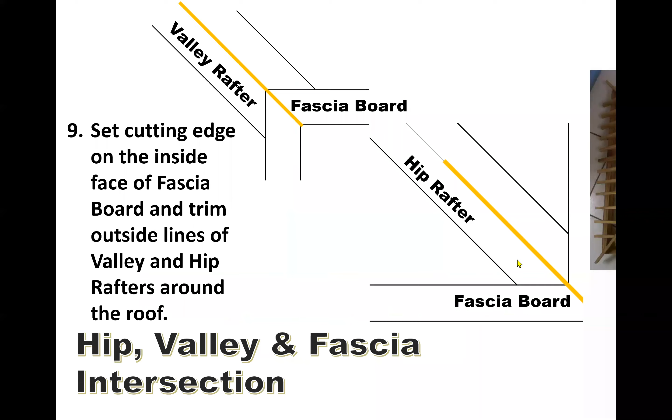So we are now going to be moving to the step where the same valley rafter meets with the ridge board to form that intersection. We're going to clean that up. This is kind of similar to what we're doing. So this would be your valley rafter going up here, and it meets with this ridge board and the blind hip. So you have three pieces of board meeting: ridge, blind hip, and valley rafter.

So we need to get those three boards meeting together. This is a kind of close-up. This is not really a nice clean joint, but I just give it to you like that so you can have an idea where we're at.

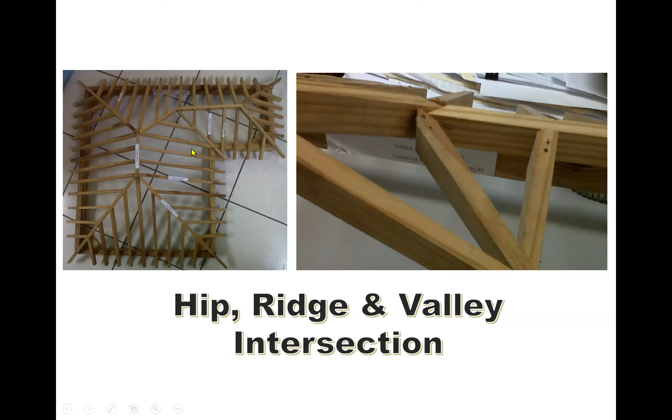So the ridge board is on the right here, and the flying or blind hip comes down to meet that one. So two pieces of board meeting together there, and those two pieces of board will now be supporting the valley rafter, which is in the inner portion right here.

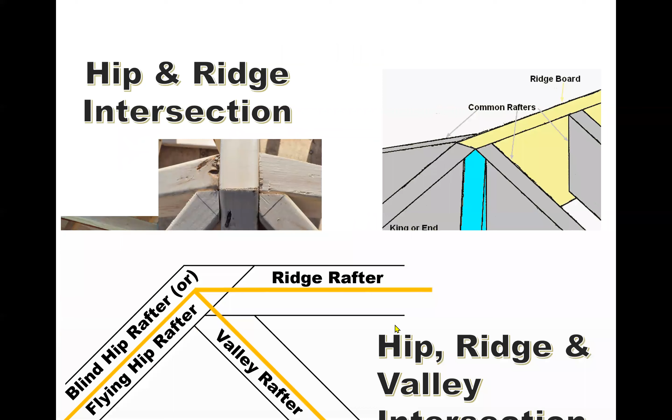All right, before we get to that intersection, we're going to be looking at how we draw that. So we're going back to our AutoCAD screen where we can now work on that portion of the drawing.

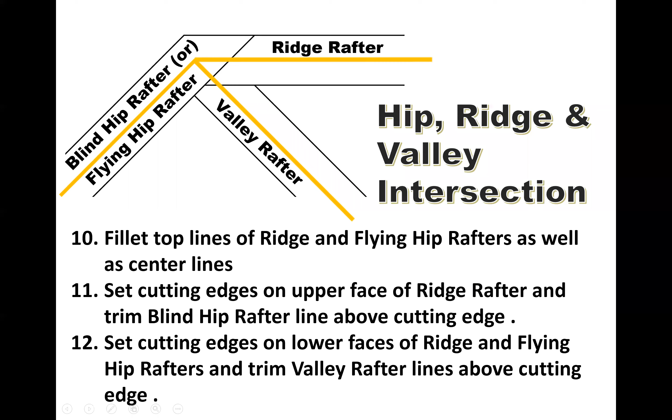All right, so we're going to zoom in now at the top of the valley rafter. So here is our valley rafter, and we're going to go up to the top, zooming in where those three members will meet. This over here on the right would represent our ridge board, the one on the left would represent our blind hip, and the one in here represents the valley rafter, which is going to be supported by these two members.

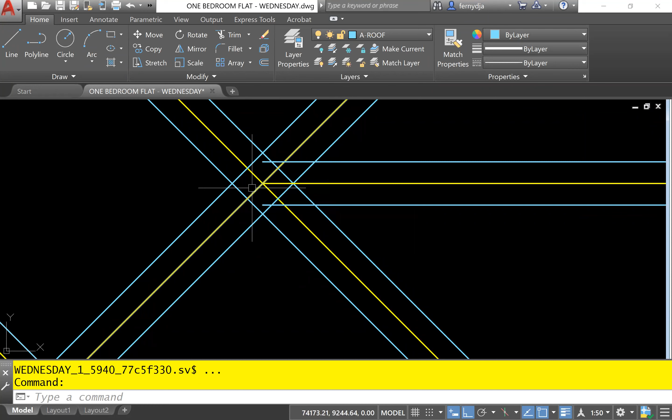So I'm going to start out by working on the ridge and the blind hip, and afterwards I will support the valley rafter. But I'll start with cleaning up the center lines first with my fillet. I want to ensure that my radius for fillet is 0 so that the three lines meet together. This one, the blind hip, meets with the valley and the ridge. The ridge board is okay, I don't need to do anything. So in fact, I just really need to fillet these two at 0 radius.

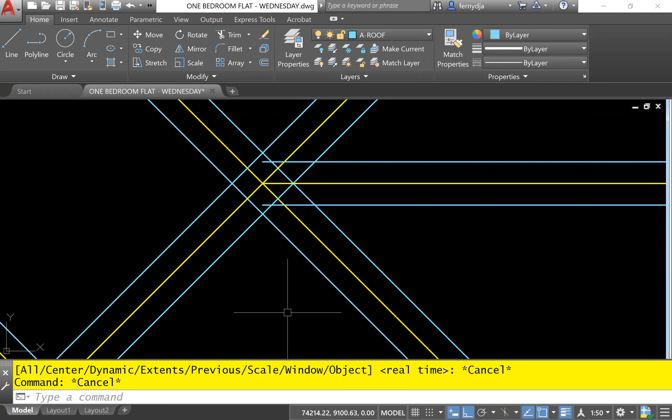So if I go with F for fillet, enter, and then I'm going to ensure that my radius is 0. Let me go again: F for fillet, enter. My radius currently is 20, so I need to either type R, enter, or click on radius down here, and then set the value of my radius to 0.

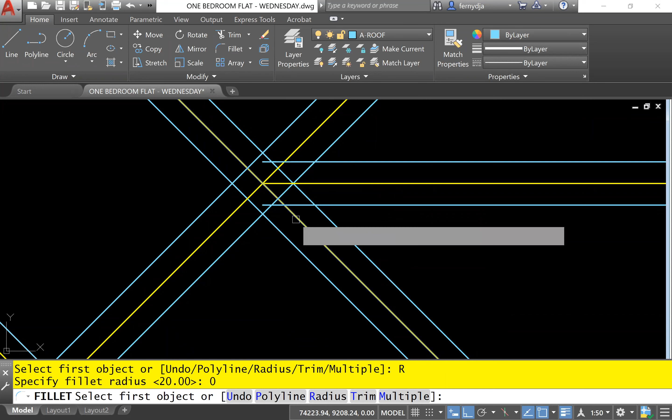Okay, and then all I need to do is click on this line, which is the center line of my valley rafter and the center line of my blind hip. So now I have these three lines meeting accordingly. I am not going to get rid of my center lines because it is going to help me know what's going on at every step of the game.

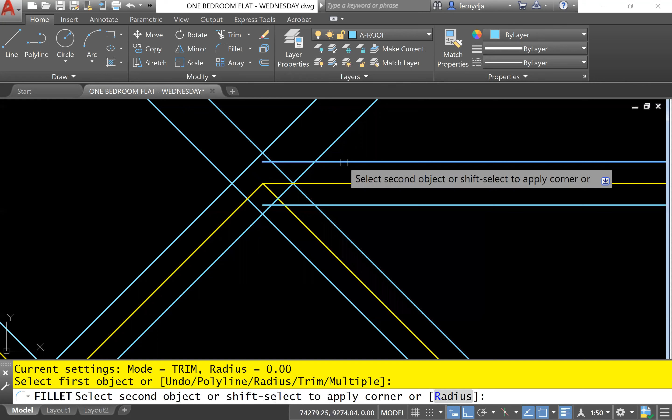So let's move on. What I will do next is also fillet the top of my ridge and the blind hip to have the two of them meeting here. I'm trying to clean up that one first. So let me press enter to repeat the fillet. That's this one and that one. Good, so that basically will terminate right there.

And then I'm going to set my cutting edge on this line here and trim off the excess going up. So TR for trim, enter, and then remove that portion. So this line is taken care of there. I can now see my blind hip right there.

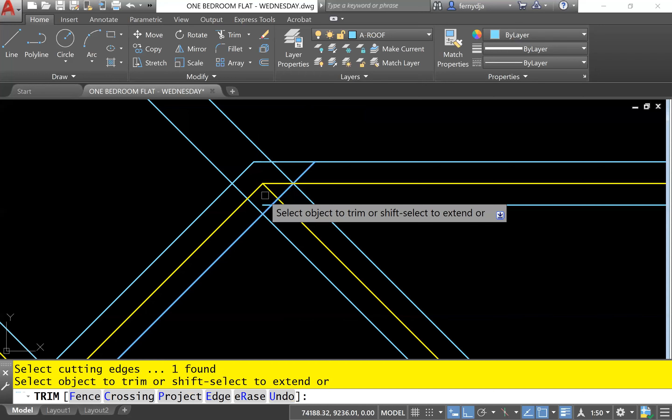But now I want to get my ridge board terminating on the blind hip. So I set my cutting edge here and TR and trim off this little piece right here. Good, so you can now see the ridge board meeting against the hip, blind hip.

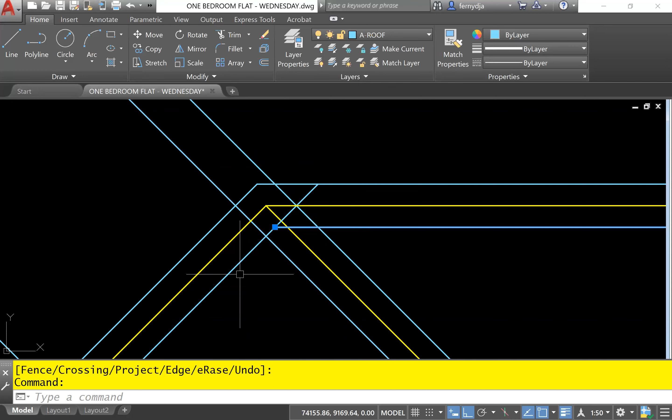So now I have two cutting edges, so I can terminate my valley rafter. I have a cutting edge here and a cutting edge there. So TR for trim, enter, and then I can trim that one, then trim that one. However, I need to also trim it down here again.

So what I have is the rafter now meeting two cuts: one cut against the ridge board and another cut against the blind hip. So these two pieces of board will first meet ridge and blind hip to support the valley rafter. I'm leaving the yellow lines to indicate the different center lines.

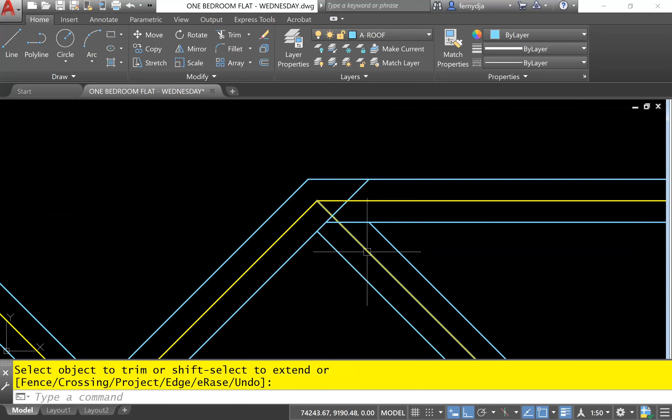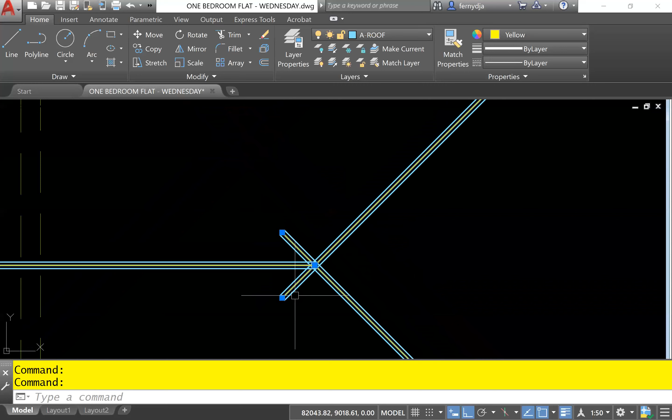What I'm going to do though is change the line weight of my center line because it's a little thick. I just want the outer lines to be heavy, so I'm going to select all of my center lines. 1, 2, 3, 4, 5 - I have some more over here. I'm going to change the line weight so that it's very thin, and only the line weight of the rafters will be a little heavy.

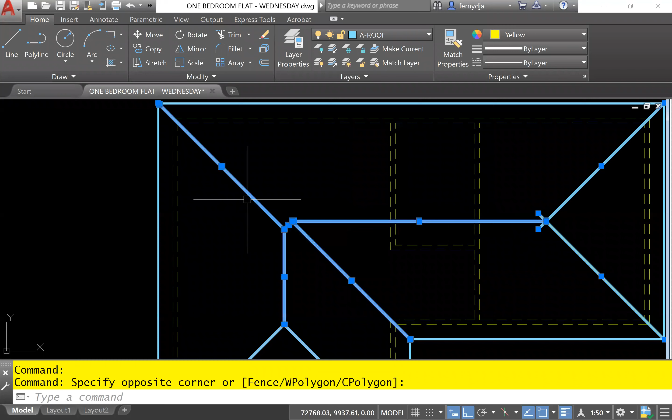Matter of fact, I don't even need the line weight for any of my rafters to be heavy. So what I will do is force all of them, because I don't want it to look too cumbersome. Let me select all of my rafters, whether center line or not, and force the line weight for these to be default.

You know what, since it's on by layer already, what I will do is just change the line weight of the layer because I don't need it to be heavy. It's just that in the roof plan, sometimes you might want the line weight to be a little heavy, but you can go with the roof plan without the line weight.

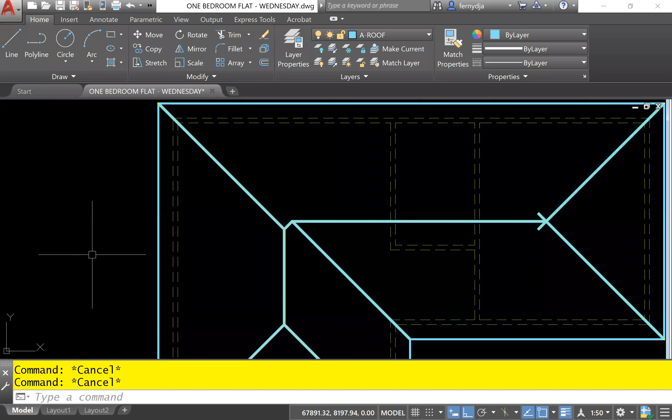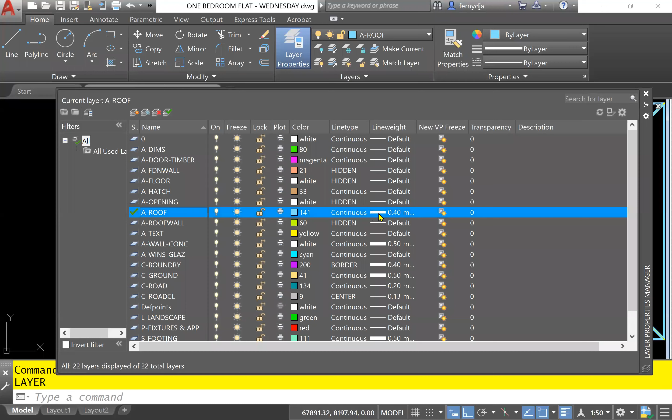All right, good. I'm going to go to my layer and change the line weight of my roof to be thinner than it is. I only want those line weights, when I cut through them, to be a little heavier. So this one really shouldn't have been so broad, so I'm changing back the line weight for my A roof. Instead of 0.4, I'm putting it back to default. You'll notice that the line weights are not so heavy anymore.

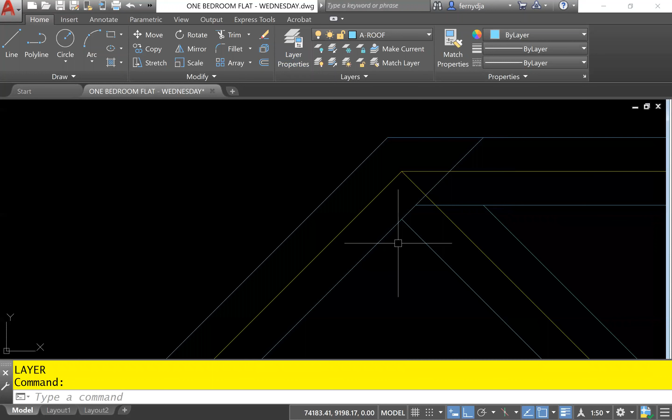So now I have my intersection right here where the valley meets the hip and ridge. Now I'm going to work on another intersection, and that's this one, where I have the two hip rafters meeting with the ridge board. But really and truly, normally you should have three common rafters meeting perpendicular to each other, and then these meet like that. So let me give you a graphical view of what it looks like.

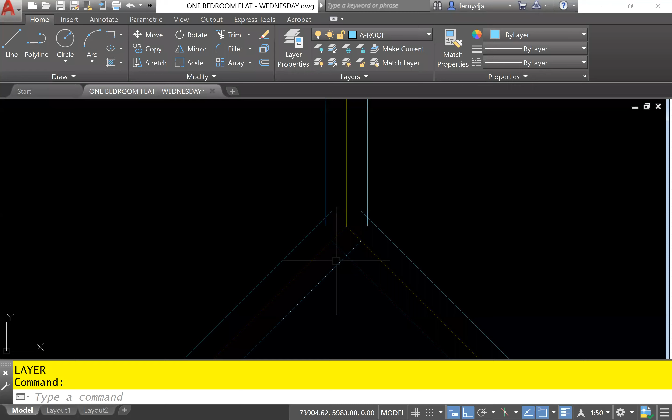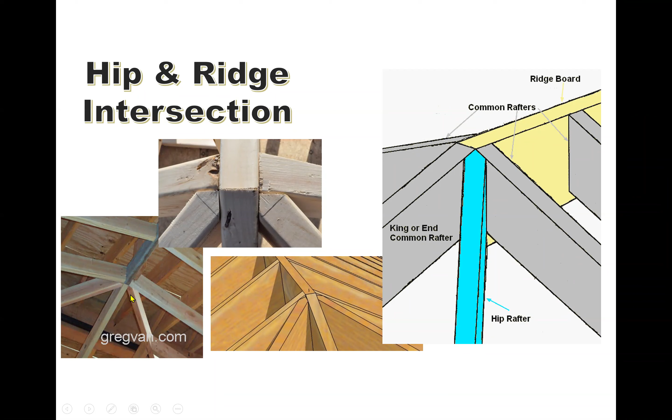And this is what it looks like underneath. So you have the ridge board, common rafter, common rafter, common rafter. Now this common rafter is what we call the king rafter or crown rafter, and then we have the hip rafters like that. So in plan, it ought to look something like this.

So we have the ridge board, and then we have the common rafter either side of your ridge board at the end here, as well as here. So the three common rafters will be perpendicular to each other. This one is really the crown or the king common rafter, and then in between you have the hip rafter.

Now what I'm going to take you through is our 5 simple steps to get you to look like this, and the steps are listed here. Step 1, we're going to extend the ridge lines to the center of the hip, which is why I change the color. So if you have the ridge line, we extend it down to touch the center line of the hip rafter on either side.

Step 2, and the numbers on this correspond with the numbers down here, so the steps basically correspond with these numbers. I just number it graphically so that you can see the steps here corresponding. Number 1 was to carry the lines down to meet the hip rafter. Then number 2 now would be to terminate where your ridge board is, so we would draw a line from endpoint to endpoint, so that you could now see your ridge board doing this.

Step 3 is to draw the lines representing the common rafters. From the end of the ridge board, we draw the line coming down perpendicular to the inside.

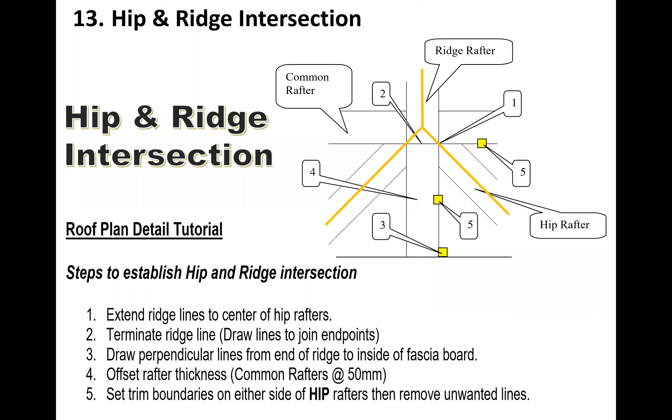Here we go. Step 1, I'm going to zoom in right here, and that is to extend these two lines to these two lines.

I'm going to use the shortcut extend, so EX, enter, and press enter one more time, which means select all.

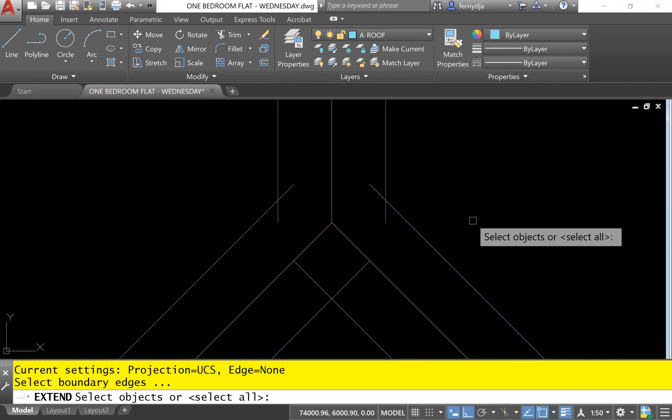When I click on this line, it extends it to the nearest boundary, which is this line. I extend that line too, and it goes to the nearest boundary. Good, now I can see my two ridge lines, so I can terminate them from endpoint to endpoint.

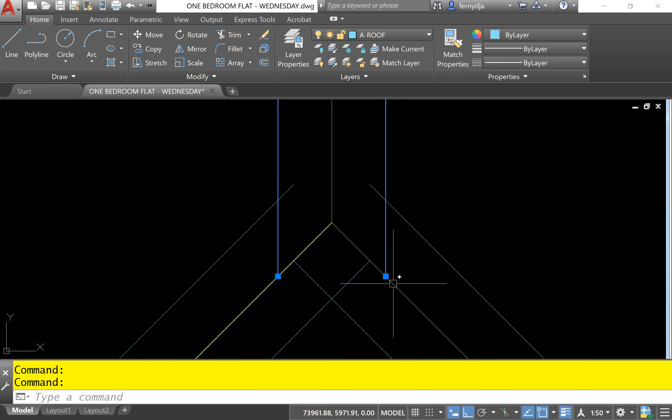So we draw a line from the endpoint of this line to the endpoint of that line. Good, that is where your ridge board would terminate.

I'm just going to use the advantage that I have right now to go ahead and draw one side of your common rafter.

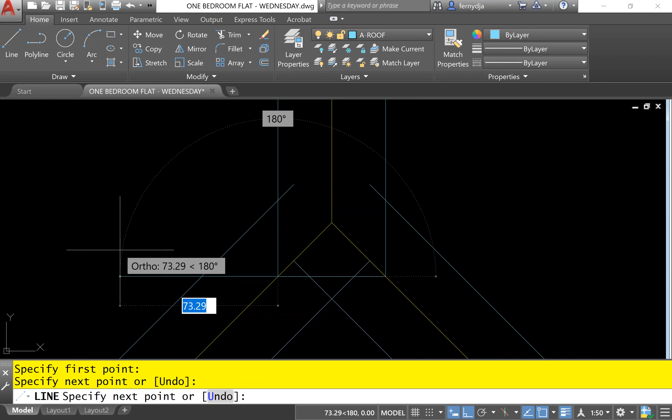I'm going to zoom out and carry it across, and it will be good if your ortho is on so you can easily go across until we get to the inside of the fascia board, and we need perpendicular osnap.

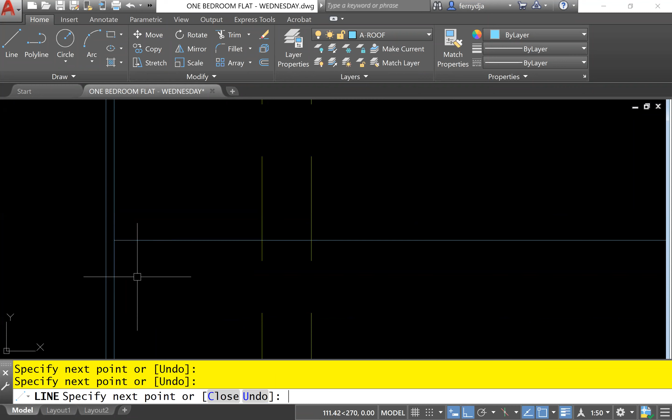That line was drawn from the endpoint of your ridge board to perpendicular inside of your fascia board. That's one, remember it's three of them we have, so we need to draw another one.

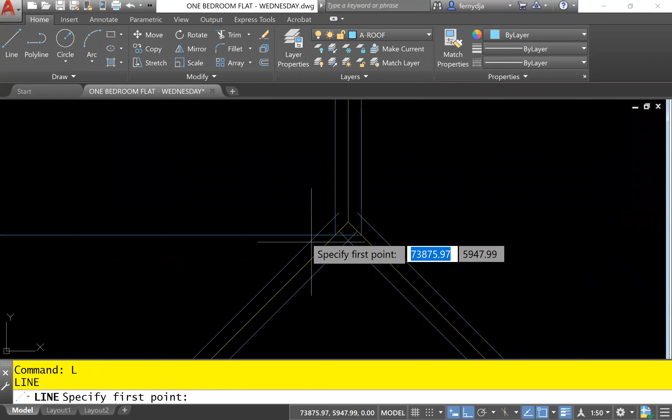So L for line, enter, and from that same point we carry one coming down, whether intersection or endpoint, and that one goes all the way down again to inside your fascia board, perpendicular. Good.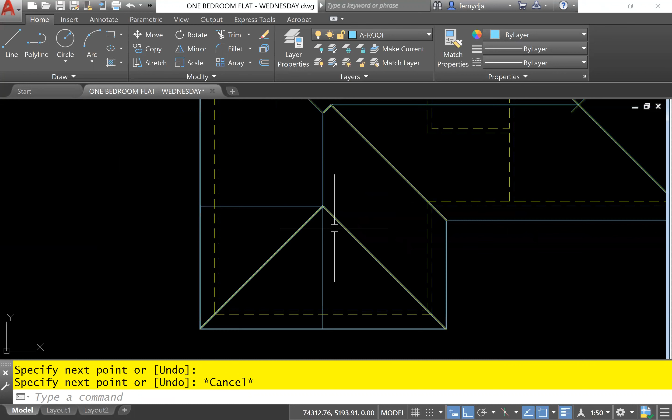Then the last one, we're going to go from the opposite end this time. From the endpoint, but this time we can't get to the fascia board because the fascia board is all out here, so we're just going to let it pass over.

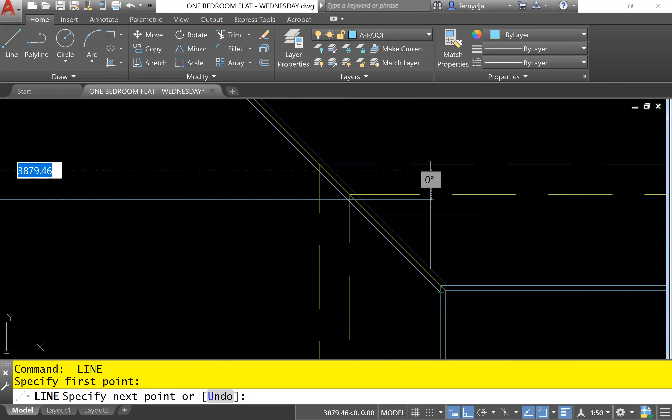This one really and truly is not a common rafter, it is a valley jack rafter. It's going to go against the valley rafter, so we'll just keep the ortho on and let it pass over.

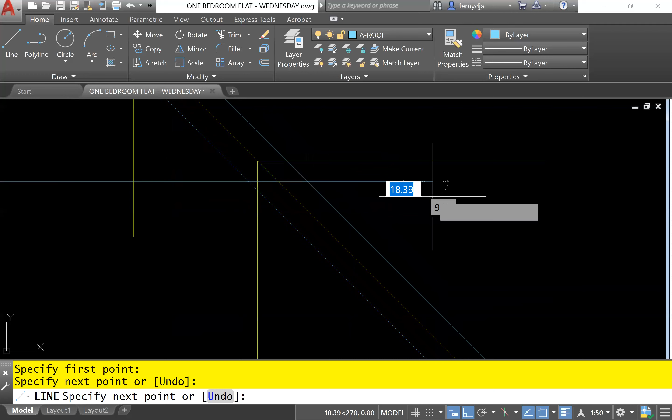I don't want to click on it because I won't know exactly where on that line. It's best that you let it pass over, click, then press enter, and later on we can trim up against this line.

So we just need to draw one side. We have one side going this way, one side going that way, one side going this way.

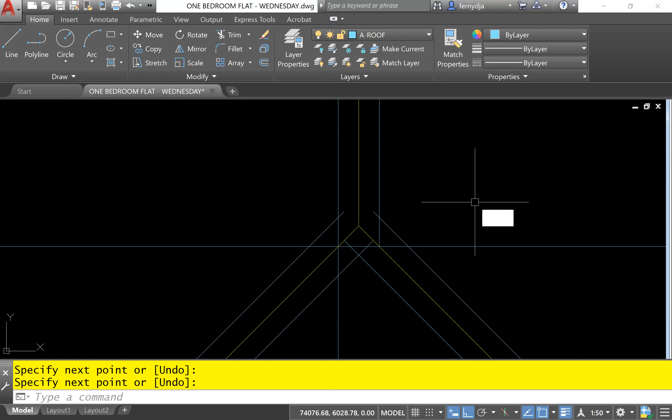Our next step is to get the other side, which is now to offset it. So if I type O, enter, and the distance we're offsetting is 50 millimeters, the actual width of the rafter, 50, enter.

We click that line and offset it above, click this line and offset above, and this line to the right. Now, how do we know which side to offset it?

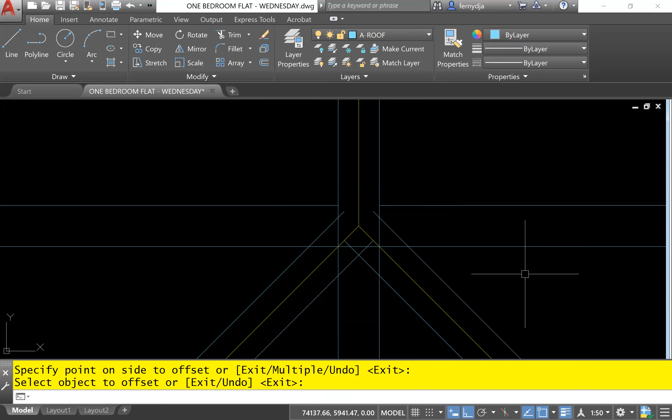The important thing to remember is that the common rafters must touch your ridge board. So if these three lines make up my ridge board, 1, 2, 3, it means I must get this line touching it.

If I were to offset this line below, then it would not be touching my ridge board. In fact it would not even be a common rafter, although this one isn't either, but over here it's a better example to understand it from.

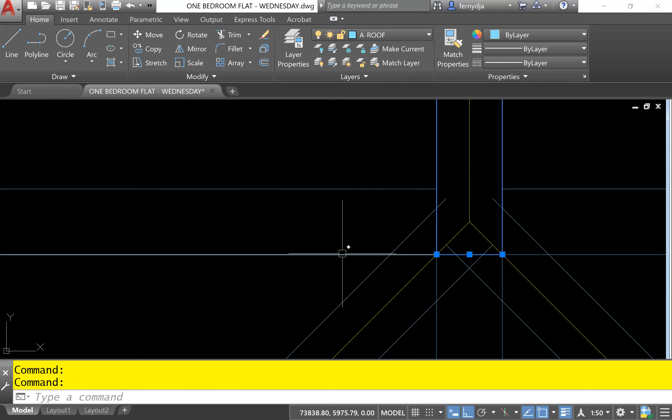If I were to offset this one down, then it would not be a common rafter, it would automatically become a hip jack rafter. But because I offset it above, it's touching the ridge board.

So it is now a common rafter. What I need to do is set the cutting edges on those sides, on either side of the hip rafters, in this case, hip over here and hip over here. So cutting edge for this line, cutting edge for this line. I can trim off that line, trim off that line, trim that line. So once you can identify your hip rafter, you know that your cutting edge will be on either side with your common rafters.

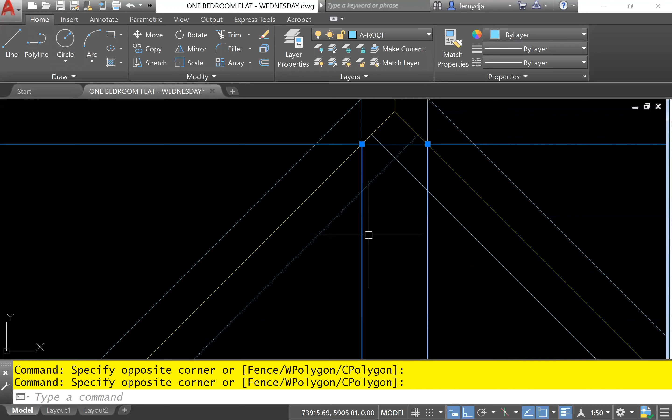So TR, enter, and you're going to be trimming off the excess. As you can see right now, that's your hip rafter fitting right between there. So likewise, if this is the cutting edge, then this is the line that you're trimming. And if this is your cutting edge, then this is the line that you're trimming.

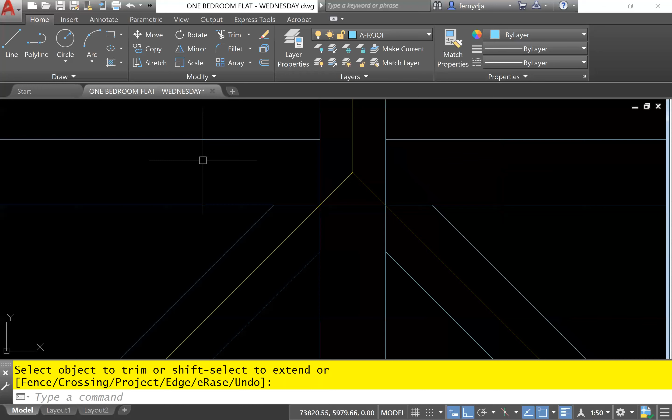So as you can see right now, we're seeing the three members. We're seeing the hip rafter on either side. We're seeing common rafter, common rafter, common rafter meeting with ridge board. All right, so we're going to do that two more times. Up here, same principle.

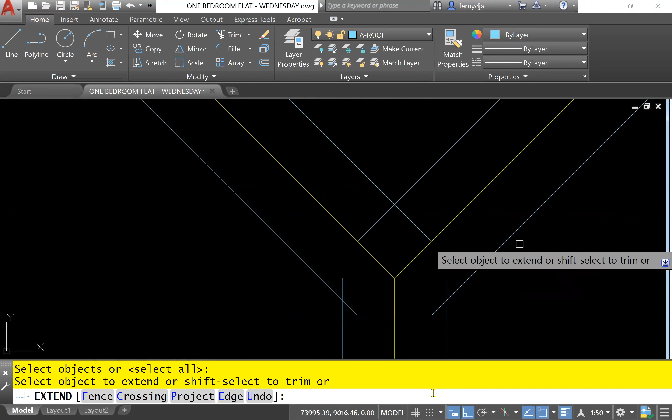So let's go again. Step 1 was to extend, EX, enter, enter. We extend the ridge line, 1, 2, enter. Then we're going to terminate the ridge board with the line command, from end point to end point, and continue with another line to the inside of the fascia board, perpendicular.

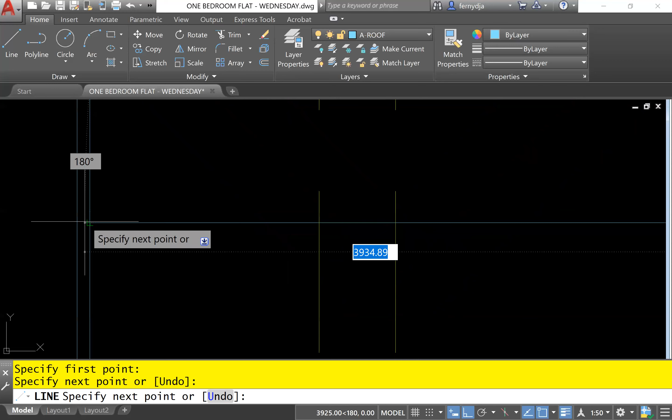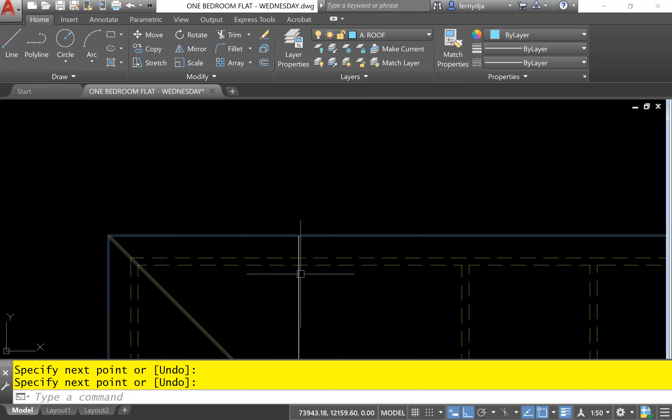That's 1. Repeat the command again. So we need 3 lines, right? We have 1 so far. So we need 1 more from that same point, going up to the inside of the fascia board, perpendicular. Oh snap. So we click, enter to end the command, enter to start the command again, and we want one going the opposite direction now.

So here we have a line going from end point or intersection, and this time around we don't know where it is going to stop, so we just carry it across and click, keep it horizontal. Then we're going to offset. Of course in this case, if you offset it above, it will not be a common rafter. It won't touch the ridge board, neither will it touch on this side.

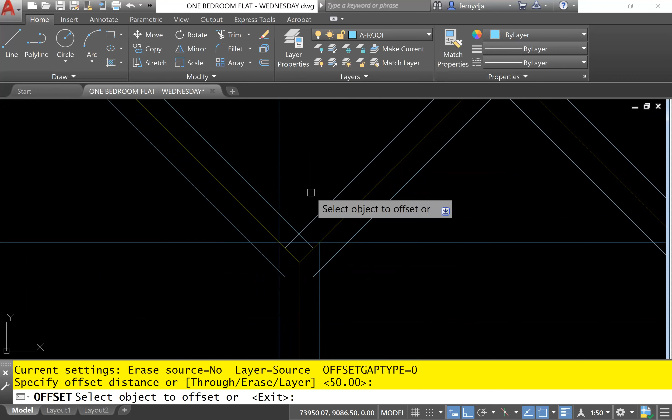So that's how we know where to offset. It must be touching the ridge board, so we have to offset down and then offset this to the right. So O, enter, and the last time we offset our distance was 50, so we don't have to type it again, we just press enter to repeat the distance. We're going to offset the vertical one to the right, offset the two horizontal ones below.

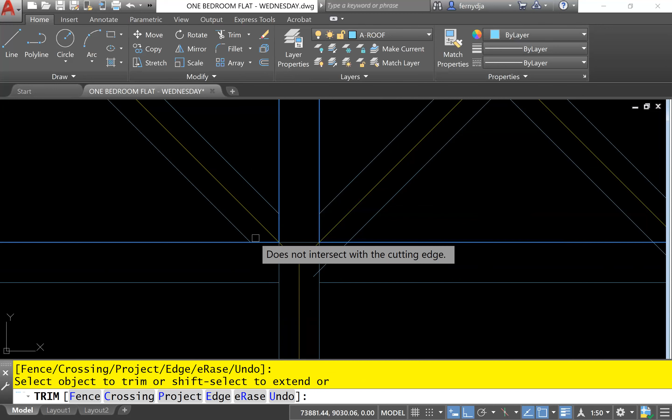Good, and it's time to clean up. So on either side of hip, 1, 2, 3, 4. TR for trim, enter, and we're going to trim the excess - that would be the distance beyond. You cutting edge there, so you trim off the excess over here. Cutting edge there, trim off the excess over here. Cutting edge there, excess. Cutting edge there, excess. And we end up with that.

So 5 simple steps. We have one more time to do the same thing on the other side of the roof over here, one more time. So by the third time, you should get it if you didn't get it before. So I'll begin by cleaning up our center lines first. So fillet with that - F, get my first 10 minutes countdown.

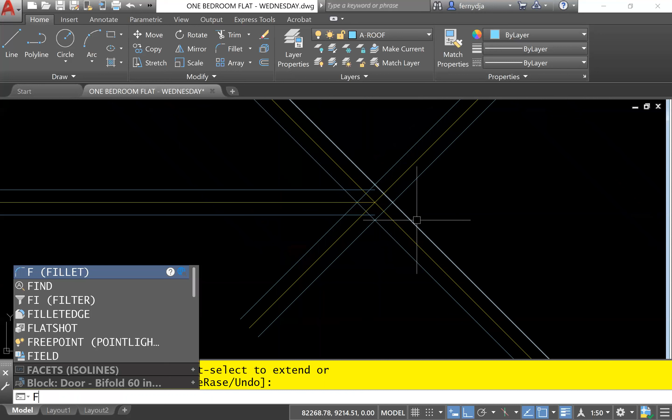Hopefully we'll finish the cleaning up before we reach the end of our first segment. So F for fillet, enter, and radius is already 0, so I just need to click these two. If you notice, my center lines are cleaned up. But I'm going to clean up the other two.

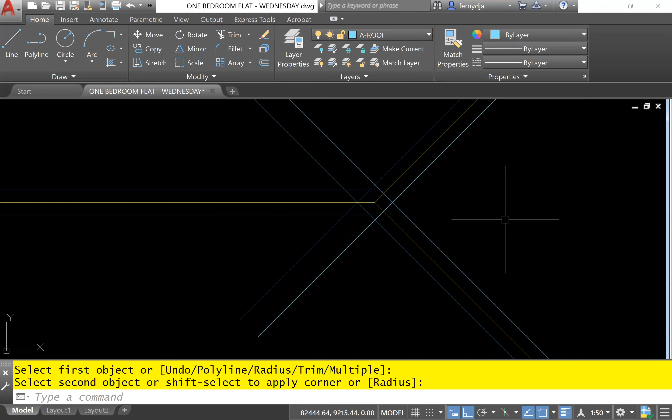So let's do one more set of fillet. F, enter, M, enter, since I'm going to do it twice. So I'm going to clean up these two just to get rid of some of those excess lines, and these two. Good. All I wanted to do is just get the place looking a little bit more organized to work with.

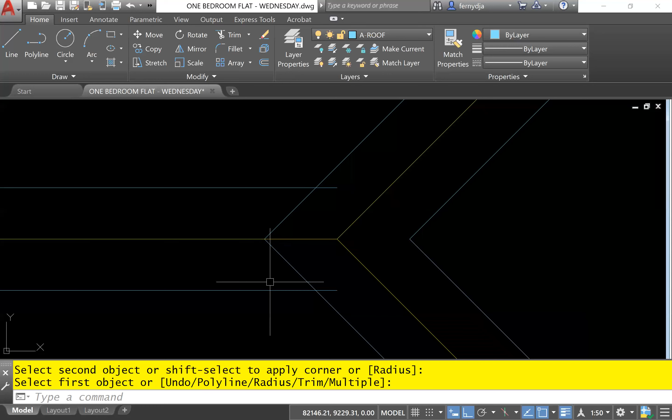Step 1, extend ridge to center of hip. So E, X, enter, enter. Put it in the shortcut mode. So we extend 1, 2. Do not extend your center line.

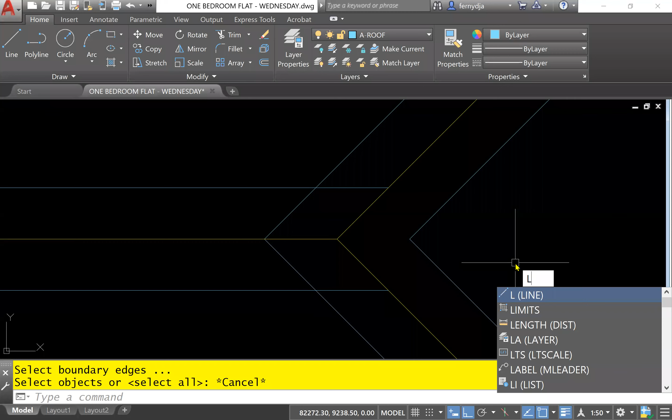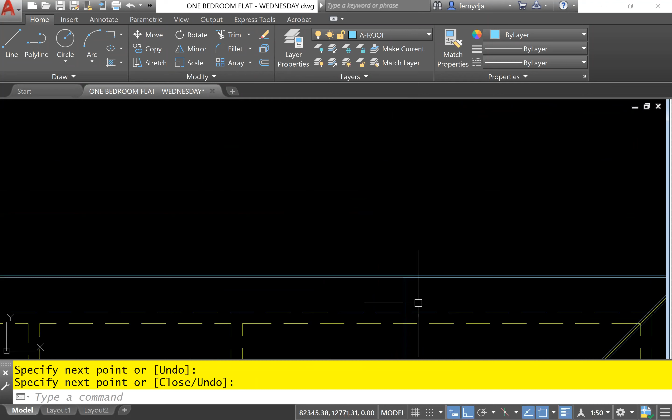Then we're going to draw the line, L for line, enter. We're going to terminate the ridge board, so from end point to end point. So my ridge board has been terminated, so I'm ready now for my common rafter. We're going north first, one side of the rafter first. So enter, enter to repeat the command from the same point.

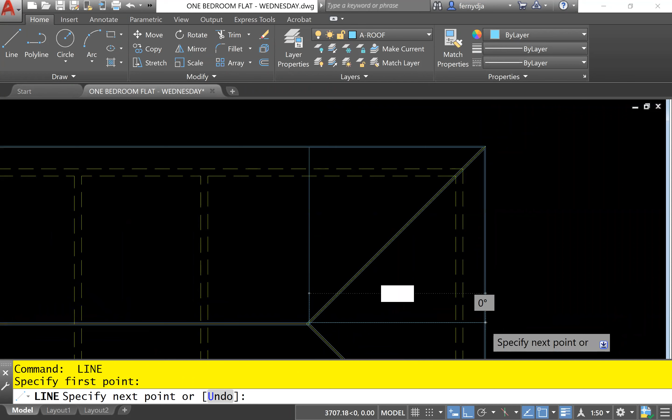We're going to go east. Zoom in—it's not perpendicular. Remember that it should be on the inside face, not the outside face. So, perpendicular. Enter, enter to repeat the command.

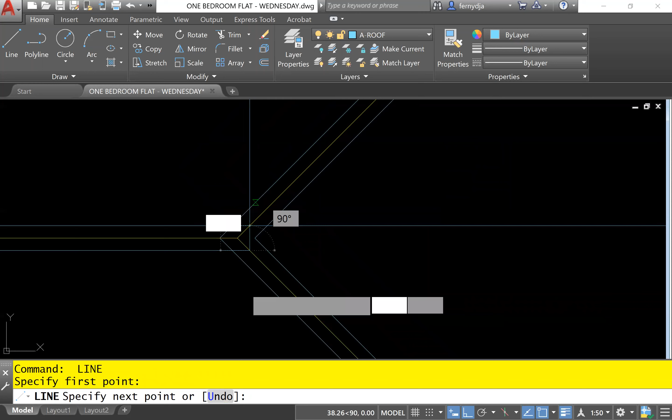We have one more—remember, it's 3 common rafters. So this one going from the opposite point, and we're going south this time. We're going down again to perpendicular on the inside. Escape. All right, so we have one side for those 3 members.

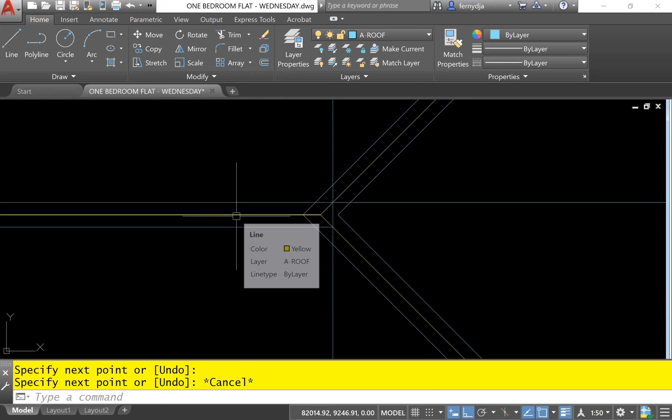We can offset the other 3 lines. So O for offset—our last offset distance was 50, so I press enter to repeat that distance. We offset to the left for these 2 vertical lines, and below for the horizontal lines, 50.

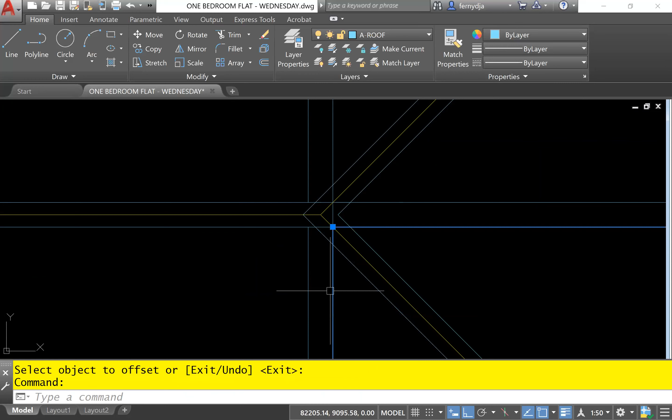Then our last step would be to set the cutting edges on either side of our hip rafter, and then trim—TR, enter—to trim off the excess. So this is my cutting edge, this is my line. That's my cutting edge, that's my line. So this is the line you're trimming.

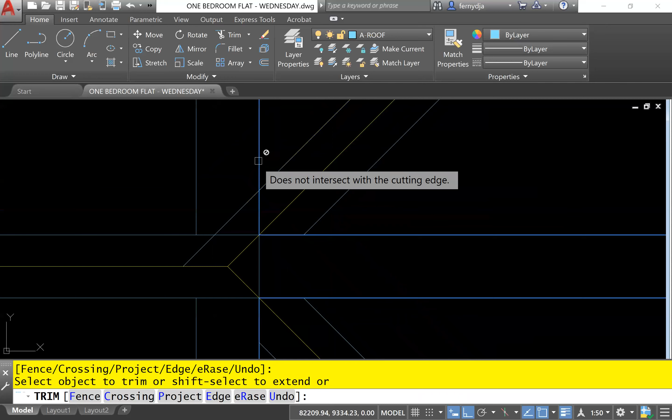So there we have the common rafters—one, two, three of them. And in between those two, we have hip rafter, hip rafter.

Okay, let me save the changes thus far. So that basically would be the layout of the roof—these are the rafters that you would likely put up first.

Now the next stage would be to look at how you populate the rest of the roof with the other rafters. That will include a lot of mirroring and array. So we'll first array to get multiple offsets, and then we're going to be trimming to clean up in each case. I have the steps that we're going to be looking at, so let me jump back over to the presentation.

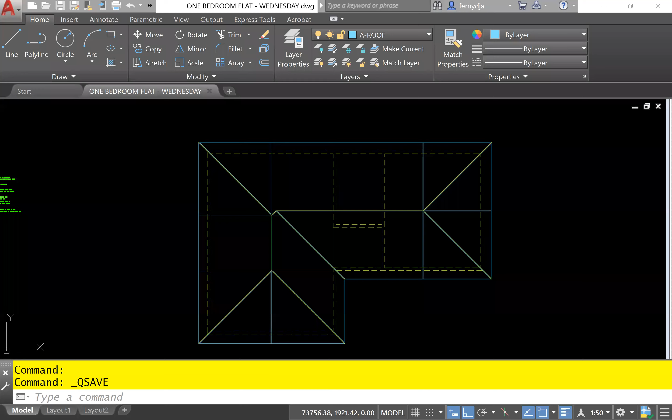If you want to know how we get 7, by the time you divide the spacing center to center in this distance, it will tell you the maximum you can get. But we don't even have to know, because the software gives you a default of 3, and you just pull it and it populates, and you stop when you know it can't go any further.

Now, because we are arraying going down, it's a negative distance. The 600 in between is the distance from center to center, but because I'm going in a negative direction, the value is negative 600.